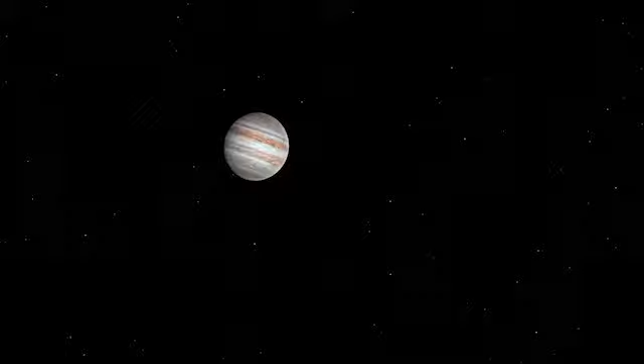Atlas is the first CubeSat designed by Project Jupiter. It represents a new mark in our group, broadening our understanding of space technology towards a new field, satellites. Atlas' mission is to detect fires in the Cerrado region, which is a Brazilian biome known for its natural wildfires. However, due to the advance of agriculture and livestock in the region, human-caused fires have been destroying the ecosystem faster than it can heal, affecting its natural balance and threatening many fauna and flora species.

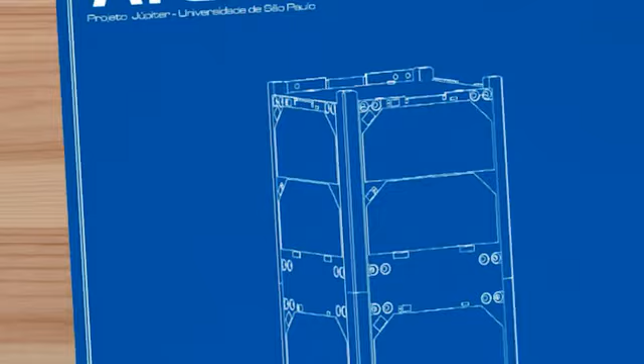The area between Poconé, in the state of Mato Grosso, and Passagem Franca, in Maranhão, is the one chosen to be monitored because it concentrates higher incidences of fires in the region. Therefore, the orbit was chosen to ensure that the satellite will pass through the desired area at least once a day for 4.3 minutes, with an altitude that allows the fire to be properly detected.

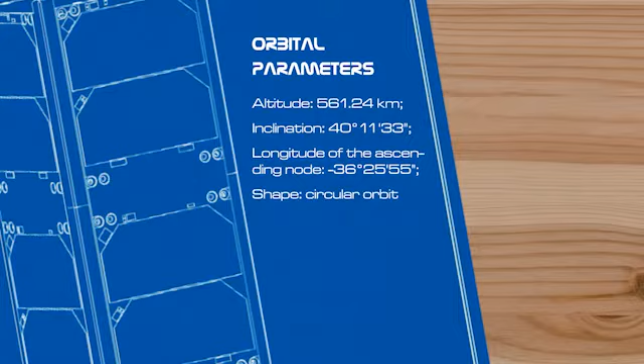The orbital parameters are altitude 561.24 kilometers, inclination of 40 degrees 11 minutes and 33 seconds, longitude of the ascending node when the satellite passes above the midpoint of the arc AB minus 36 degrees 25 minutes and 55 seconds, and the shape of the orbit is circular.

Atlas shall detect fires using an XI400 infrared camera. This module was chosen because it has a spectral range of 8 to 14 micrometers, a resolution of 382 by 288 pixels, allowing a spatial resolution of 1 kilometer, and is economically viable.

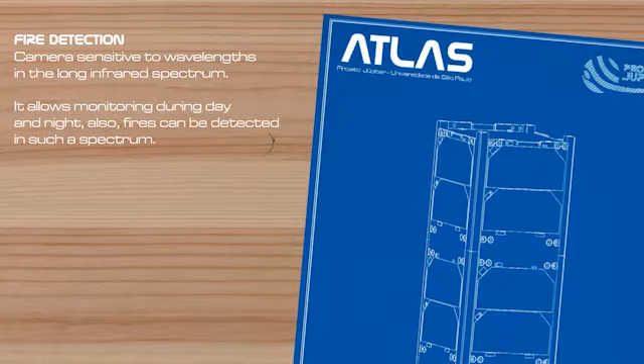Although there are different methods for fire detection, the team opted to use a camera sensitive to wavelengths in the long-wave infrared spectrum. Firstly, because it allows monitoring during day and night, which doesn't happen with RGB cameras. Secondly, because although it is not optimal, fires can be detected in such spectrum.

Atlas is a 3U structure made of aluminium 7075. It was designed according to the standards imposed by the competition and international standards. To use the space efficiently, we use the PC104 standard, stacking PCBs with the electronics for the subsystems. To allow for sturdy and versatile placements and dimensions of the boards, threaded rods were deployed to fixate them.

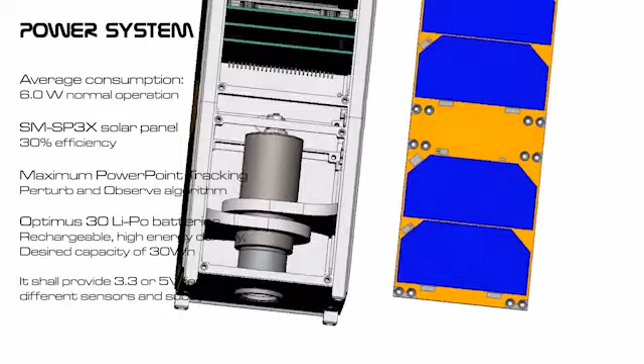The Electric Power System, EPS, shall provide enough power for the satellite to operate effectively. Atlas is expected to have an average consumption of 6 watts for normal operations. In order to provide such power, the SM-SP3X solar panel, designed by NPC Spacemind, was chosen because, among other characteristics, it has approximately 30% efficiency.

To take most advantage out of the solar panels, a maximum power point tracking system will be employed in a microcontroller using a perturb and observe algorithm to keep the power drawn from the panels at a maximum without causing electrical problems. Additionally, to provide power while the satellite passes through shadows or when the solar radiance is low, the Optimus 30 LiPo batteries were chosen because they are rechargeable, have a high energy density, a long life cycle, and the desired capacity of 30 watt-hours.

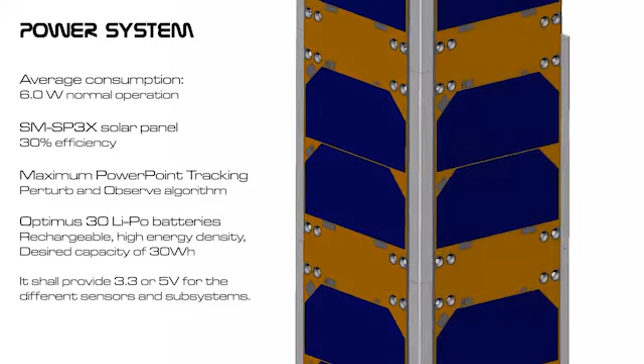Moreover, this component also has a system to prevent thermal runaway in addition to circuits to prevent undervoltage, overvoltage, and overcurrent. Finally, the system counts with voltage regulators to provide each component with the necessary power, and thus, it shall provide 3.3 or 5 volts for the different sensors and subsystems.

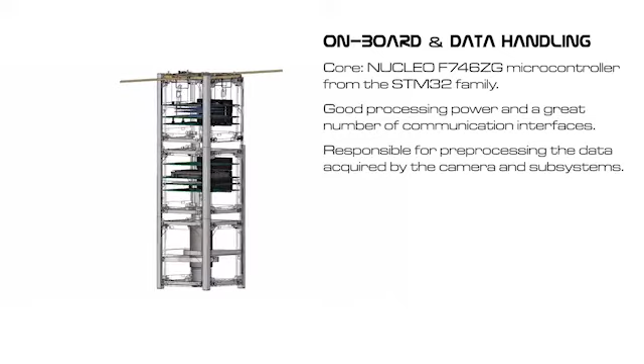The onboard and data handling is a subsystem that deals with data received from the different sensors and subsystems. The core of this subsystem is a Nucleo F746ZG microcontroller from the STM32 family. Its main strengths are good processing power and a great number of communication interfaces which will be used to communicate with the sensors, such as I2C, SPI, UART, USART.

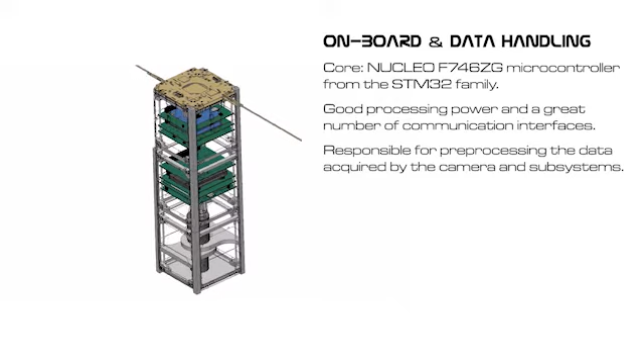Additionally, it has an external memory for data storage with SD cards. Moreover, this subsystem is responsible for pre-processing the data acquired by the camera and from the other subsystems, so they can be sent to the ground station for further analysis.

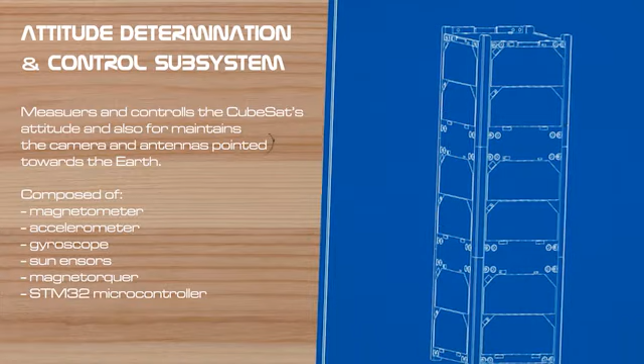The attitude determination and control subsystem is responsible for measuring and controlling the CubeSat's attitude and also for maintaining the camera and antennas pointed towards the Earth. This system is composed of magnetometer, accelerometer, gyroscope, sun sensors, magnetorquer, and an STM32 microcontroller for performing the calculations necessary to attitude control. All these sensors, actuators, and also the microcontroller were chosen based on low power consumption, low mass, and relatively high precision, which are essential characteristics for the CubeSat's components.

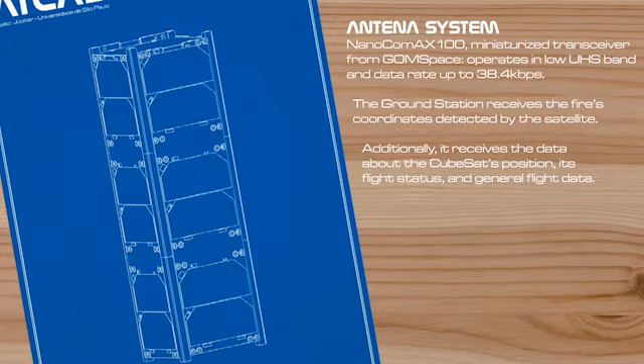The TT&C provides detail regarding the satellite's status, determination of its location through tracking range signals, and the uplink commands given to the platform. For data transmission purposes, we selected NanoCom AX100, a miniaturized transceiver from GomSpace. This device caught our attention due to its capacity to operate in low UHF band and data rate up to 38.4 kilobits per second. Besides those features, this transceiver also comes with built-in space protocols such as high-level data link control and the CubeSat Space Protocol (CSP).

The ground station shall be able to receive the fire's coordinates detected by the satellite. Additionally, it should receive data about the CubeSat's position, its flight status, and the general flight data.

Finally, the thermal control subsystem is responsible for ensuring the temperature is adequate for the operation. It was chosen as a passive control system using multi-layer insulation, MLI. MLI reflects solar radiation, maintaining the instruments at an adequate temperature to operate while in the presence of sunlight, and keeps the heat, protecting the instruments from the cold while in Earth's shadow.

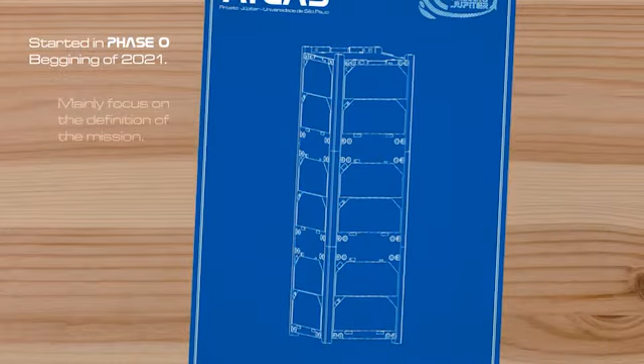The project was started in Phase 0, which took place at the beginning of 2021, and was mainly focused on the definition of the mission. Moving further to Phase A, which happened in the first semester of 2021, the team made feasibility studies, drafted a preliminary architecture for the systems, and defined the system-level requirements. Currently, our project is in Phase B, which consists mainly of preliminary design and technology completion.

The next phases are going to be Phase C, that consists of final design and fabrication. Phase D, in which the system will be assembled, tested, and launched by the year 2023. Then, in Phase E, Atlas will be operating to detect fires in the Cerrado region. And finally, by the year 2024, Phase F will begin, in which the satellite will be decommissioned.

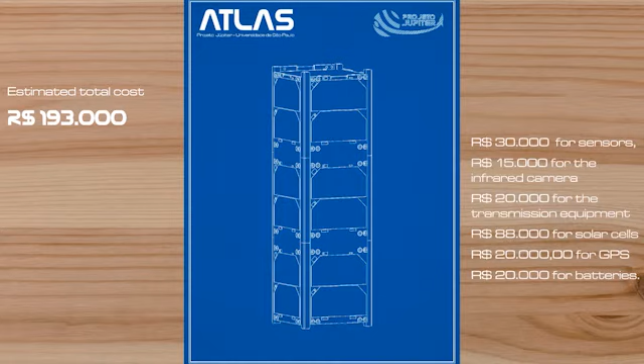Since Atlas is the first CubeSat designed by the team, we opted to use mainly commercial off-the-shelf components with flight heritage. It is estimated a total cost of 193,000 Brazilian reals, of which 30,000 are for sensors, 15,000 for the infrared camera, 20,000 for transmission equipment, 88,000 for solar cells, 20,000 for GPS, and 20,000 for batteries.

So that was a quick overview of Atlas, Project Jupiter's first CubeSat and a pioneer towards the group's knowledge of satellites.